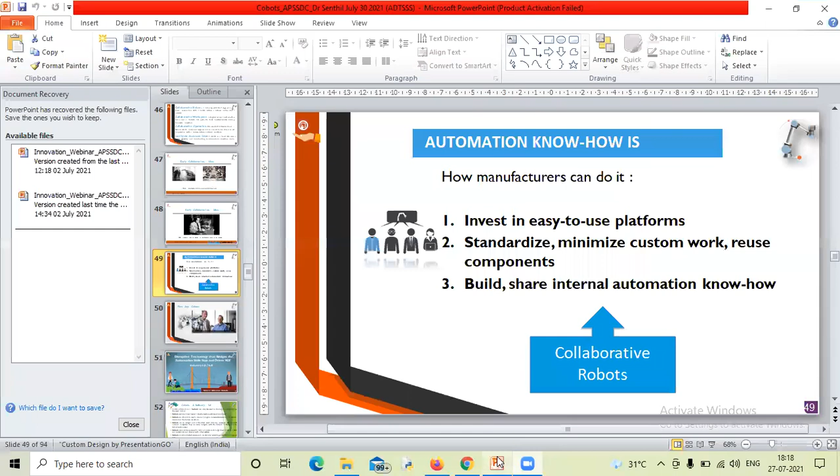So now, yesterday we have been discussing about this robot. Let me go through this one. So this is what the robot which we discussed about yesterday, and let me review yesterday's topics. Yesterday we have been discussing about the introduction to Industry 4.0, fourth industry revolution technologies, and also we have been discussing about the short introduction to the collaborative robot, cobot, isn't it? So now let us see the

continuation of this class, automation know-how. So we must use those technologies which are easy to use platforms. For example, collaborative robot is a very easy to use platform, and we should also standardize and minimize the custom work and reuse the components which can be done using the collaborative robot. You must be able to share the internal automation technical know-how with the collaborative robots.

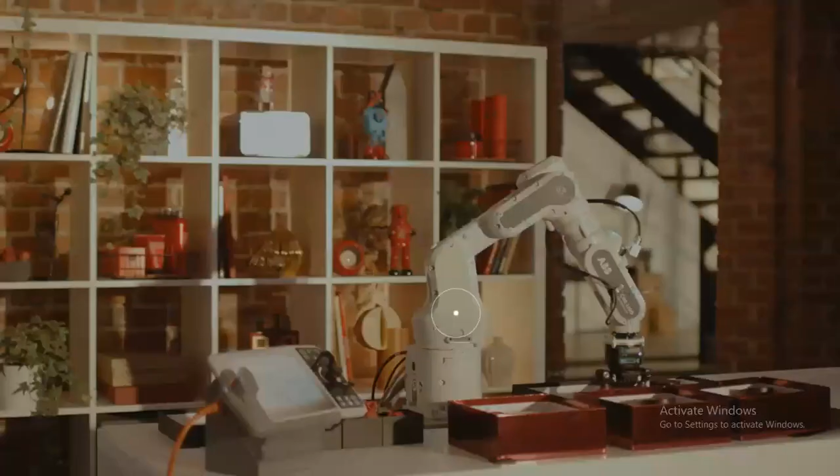So this is what you can say - if you see the collaborative robot design, there are a lot of sensors incorporated into these collaborative robots. For example, sensors to detect motion, sensors to detect distance, sensors to detect displacement, sensors to detect the weight of the object you lift, sensors to detect interactions, and sensors designed to determine motion. These cobots have several sensors incorporated in the system, so they are able to do the job more easily, more user friendly, and more comfortably along with the human workforce.

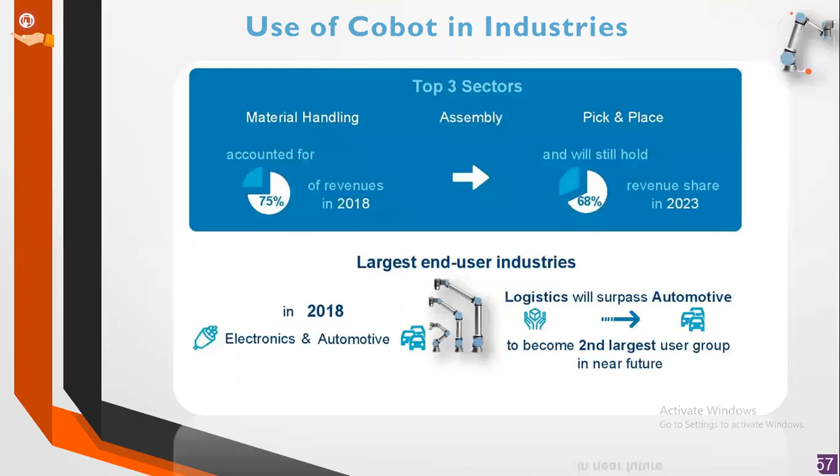It consists of an eye which is fitted with lidar. Do you know what lidar means? It is an imaging and detection system - light imaging and detection, or light detection and ranging you can call it. It will be able to detect what is around the surroundings, and that is how it makes the environment more user friendly and comfortable for the human workforce to operate.

It has got arms that will be able to pick and place objects from one place to another place. So these are the features of the collaborative robot.

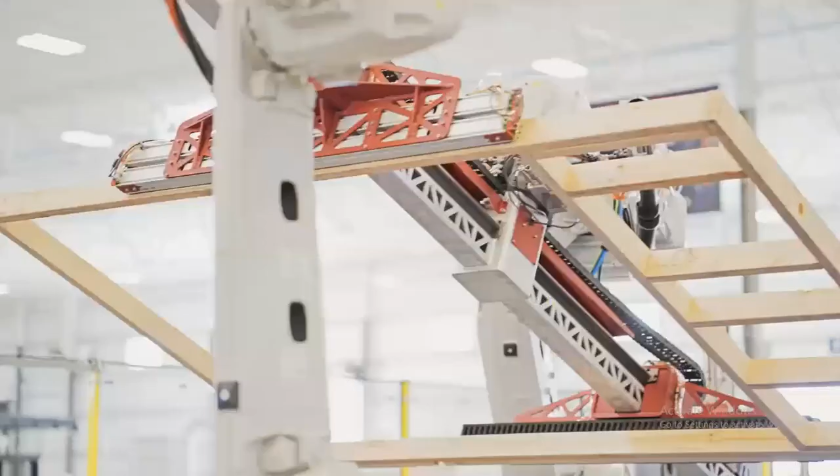So you can see that there is no human workforce working along with the universal robot, like industrial robots. You can see that the people are standing outside the fence, a little bit of distance away from the robots.

So from this video, you can see that these are very huge robots, like an industrial robot that is kept inside the fence, to avoid any accidents.

Moving forward, this slide shows the different features of the cobot. It is a lightweight cobot, 11 kg for this type of robot. Typically, robots weighing 50 to 100 kg can lift 5 kg. These are small cobots - they are very compact, have a touchpad, and are very easy to move around. They have 360 degrees of freedom, and we can easily dismantle them and move them from one place to another place, so there is no need to change the production layout.

For example, you can see in the videos later on that you don't need to change the production layout. It can be installed in production lines where conventional industrial robots cannot reach. So where industrial robots cannot perform the task, we go for universal, collaborative robots. Let me play a video over here.

So they've got a teach pendant - the one which is used by the person is called a teach pendant.

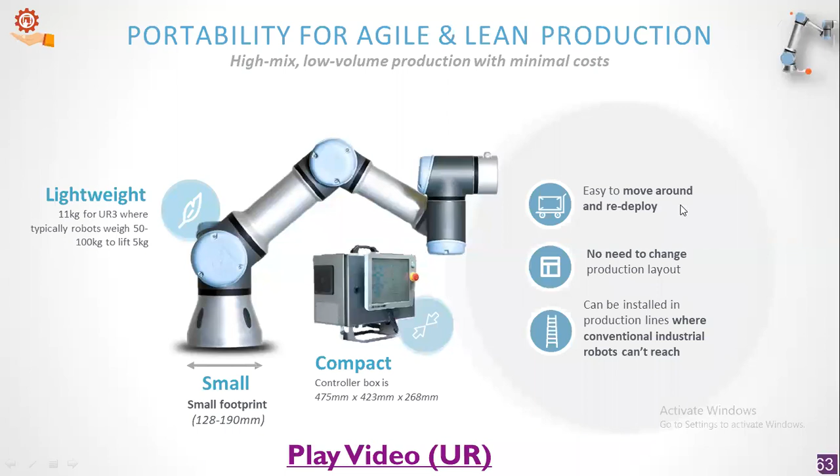Pressure is equal to force per unit area. So if you know the force, you can understand the pressure which has to be exerted on the object. These are the 6-axis cobots.

Let me show a video. It's a company called L'Oreal. You might have heard of L'Oreal because it manufactures shampoos. Let us now look at how this company uses the collaborative robot, and how they are able to save time, save cost, and save the human workforce from accidents. So let's see how the whole industry is working with collaborative robots and gaining more confidence and advantages from their usage. Let me play a video here.

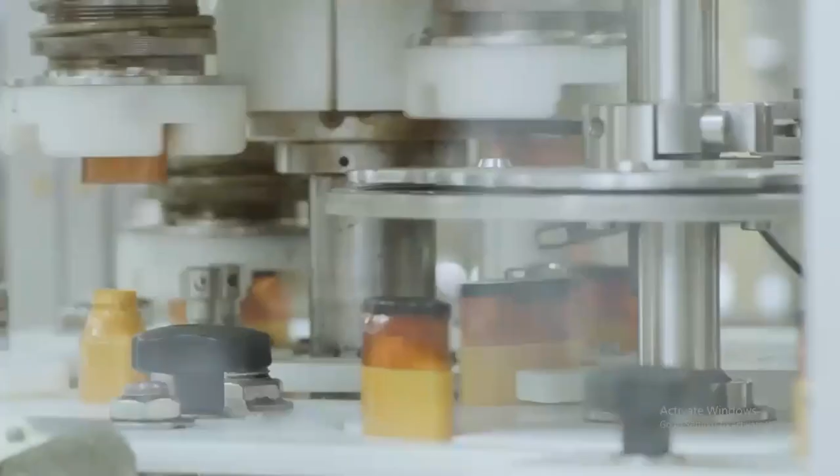One of the key priorities for Pune factory as of now is being flexible and agile in terms of serving the market in real time.

On line number 27, which is one of the fastest lines in my production unit, the end of line operation, putting the boxes on the pallet, we were doing it manually. A single operator doing the entire job of lifting 8,500 kgs of load every shift.

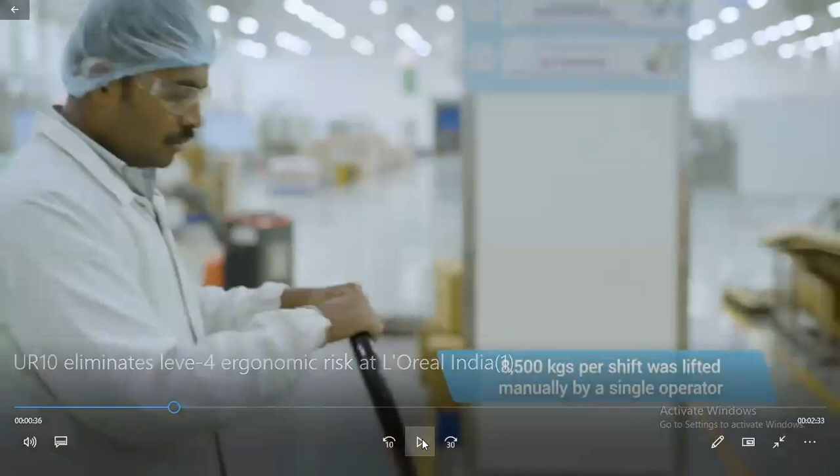A single operator doing the entire job of lifting 8,500 kgs per shift was lifted manually by a single operator. 8,500 kgs of load every shift.

Right now, L'Oreal is focusing and stepping up really hard onto the ergonomics part, and this was one of the major concerns which came from down the line. When we did our ergonomic risk analysis, we found that it is a level 4 risk and we wanted to eliminate that risk.

UR10 we installed before 2 years. The purpose of this installation was automatic palletization.

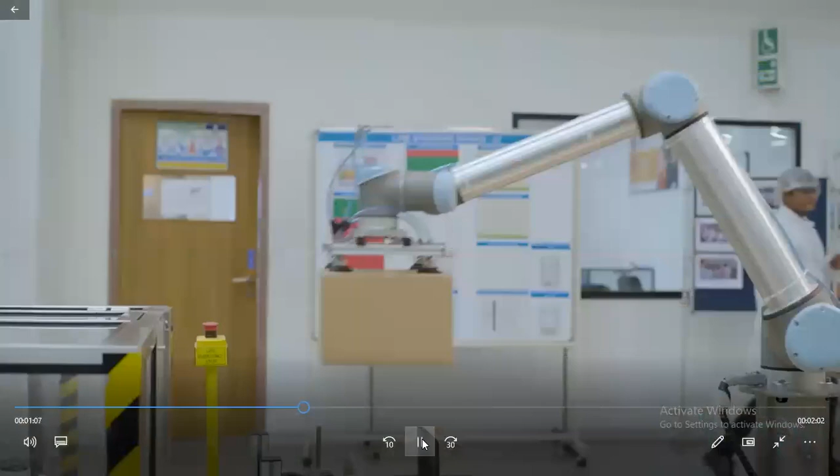Before installation of this cobot, we used a single pallet at a time for palletization. Now, simultaneously, we can use both pallets without stopping the line, where we have a 30-minute saving in every shift for pallet changeover.

We can work along with the cobot without any cage, without any safety guards. Since installation, we have never faced any breakdown problems. You can say this product is maintenance free, without any lubrication, without any maintenance investments.

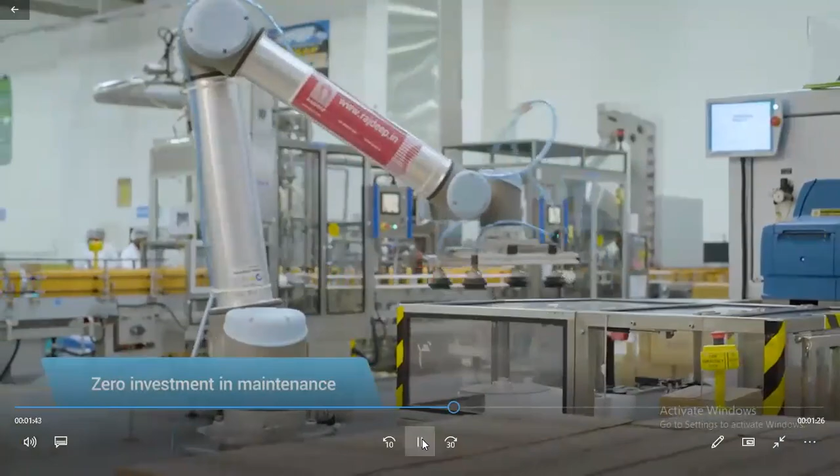We have different people coming onto the lines in different shifts, so sometimes when people change, it might impact the efficiency of the line. But with the cobot coming into the picture, it gives you process accuracy at just a single click.

Our team can use this cobot on any lines as per our requirement. We can shift this cobot easily.

Before the cobot came into the picture, we used to have a number of setups done, and it used to take around 60 to 70 minutes just to change from one format to another. But now it's simple. You just need to click the button, click it out, and the robot is ready to run on another variant.

This has helped us eliminate that ergonomic risk completely, that is continuously bending and putting boxes on the pallet. Secondly, handling a load equivalent to 8 tons in a shift is completely eliminated.

We have purchased one more cobot and deployed it on one of our lines. I can say that this cobot is very user-friendly, maintenance-free, and very efficient. We are really very happy to have the universal cobot on our line.

So, faculty members, we have seen this video of how this collaborative robot was lifting the places. These are the different applications of collaborative robots.

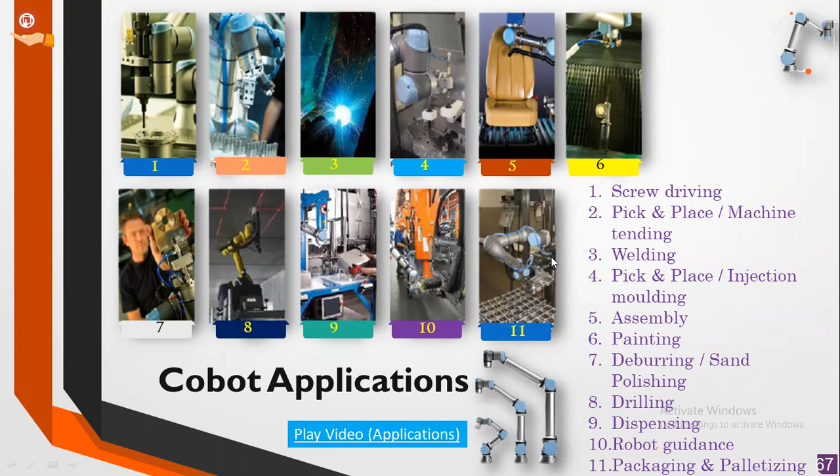For example, if there is an industry with a welding option and another with a painting option, these are two entirely different applications, welding and painting. This is how each and every industry makes use of collaborative robots for their manufacturing processes. Let me play a short video over here.

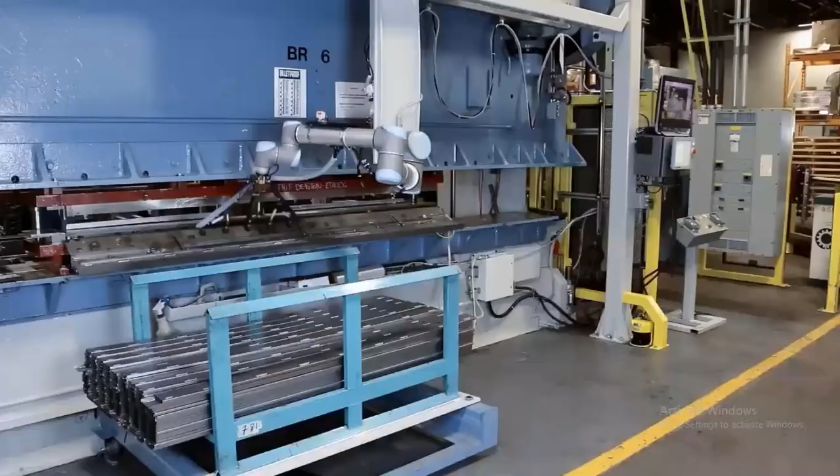Polishing. You can see how it is used for polishing. Again, pick and place of another object. Screw driving.

It can be used for quality inspection also, to find out defects using machine vision technology, guiding and dispensing.

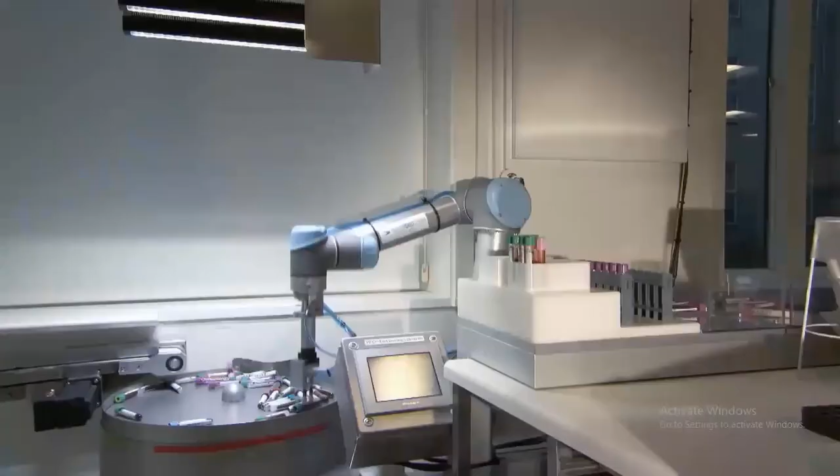Lab analysis testing is used in pharmaceutical industries. They are used in pharmaceutical industries.

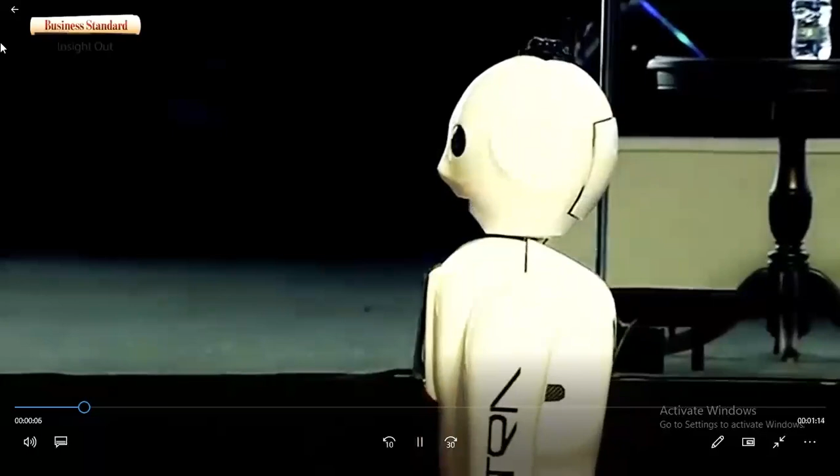Ladies and gentlemen, we would like to introduce you to Mitra, an indigenous robot developed by a young startup from Bengaluru.

So this is a humanoid robot.

May we now request the Honorable Prime Minister Shri Narendra Modi and Ms. Ivanka Trump to initiate the logo launch for the Global Entrepreneurship Summit 2017. We request the Prime Minister to kindly press the Indian flag button on the screen. Welcome, welcome, Shri Narendra Modi. May we now request Ms. Ivanka Trump to kindly press the US flag button on the screen.

So this is how the humanoid robot is an entirely different robot. This is the current status of collaborative robot usage in the industries, faculty members. Especially the main usage of these collaborative robots is in the automotive industries. It is used for material handling, welding, deburring, bolt tightening, and sealant applications.

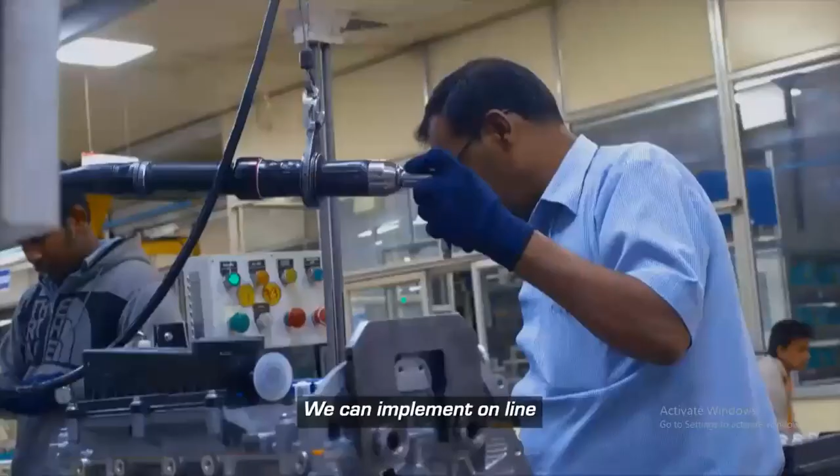I have been working here for the last 25 years. Our focus is mainly on the quality piece. Whichever is critical to quality, we want to automate it. So one of our team members gave a thought: can we go for a collaborative robot? We can implement it on line and it can work with our associates.

It's not only the sealant application or the tightening application, there is a camera which checks the quality and it gets recorded. We are able to real-time monitor the cobot performance also. It is very safe, easy to teach, very flexible. When the cobot is working with them, people are loving it.

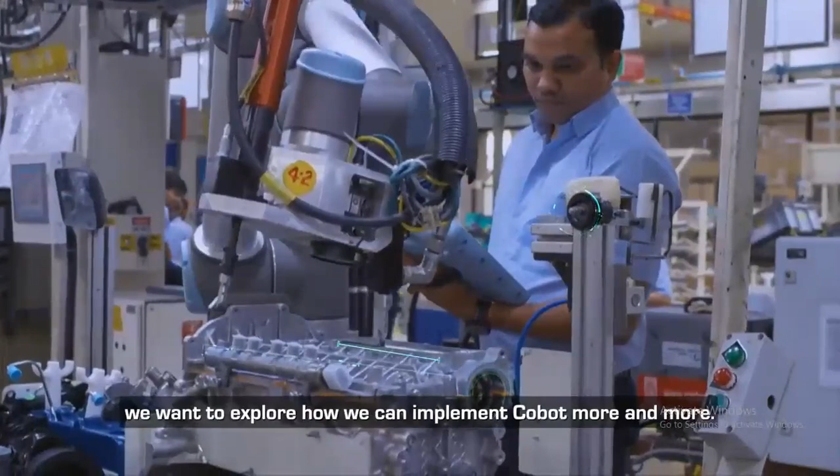The future is enormous. We all have to continuously improve with respect to what we were doing yesterday.

This is how one of the industries, Mahindra, is using the collaborative robot. These are the usage of collaborative robots in Indian MSMEs. MSME stands for micro, small, medium enterprises in India, and they are using collaborative robots for different applications.

For example, Craft and Technique industry in Pune is using the collaborative robot. Shruti Engineers in Pune, New Engineering Works in Jamshedpur, Aura Lab in Chennai, and SMEW Textile Machinery in Gujarat - these are several MSMEs using collaborative robots.

These cobots are boosting engines like the Make in India initiative. SMEW Textile Machinery in Gujarat uses collaborative robots and found their efficiency increased by 300%. Shruti Engineers in Pune says that by utilizing the collaborative robot, they're able to increase their daily production by 75%. These are the benefits of using collaborative robots in their manufacturing process.

Let me play a short video over here which will tell about this.

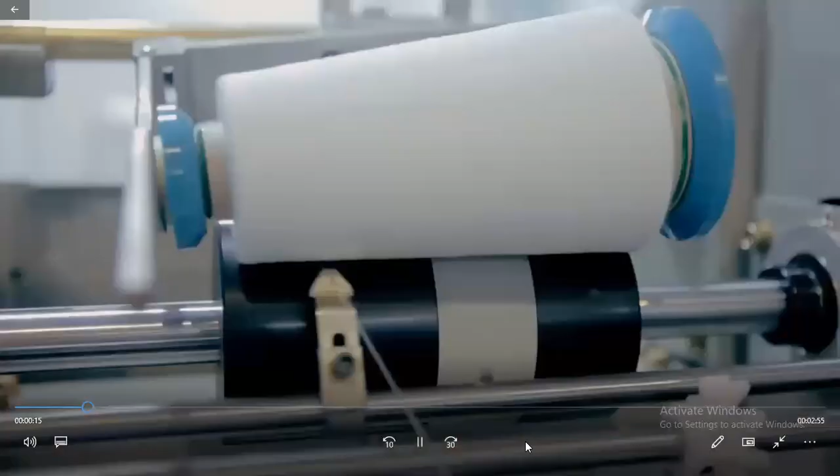Welcome to Ahmedabad, India's fastest growing city. This small city is home to some of India's biggest textile manufacturers, an industry established here as early as the 19th century. The entrepreneurship talent here was able to bring mechanized manufacturing almost 140 years ago.

I am Ashish Nagarshet, managing director at SMEW Textile Machinery Private Limited. We are a textile machine manufacturer based in Ahmedabad, India. SMEW was started in 1958 and has been our family business since then. We make textile winding machines - our main products are the package winding machine, the rewinding machine, and some customized machines for winding as well.

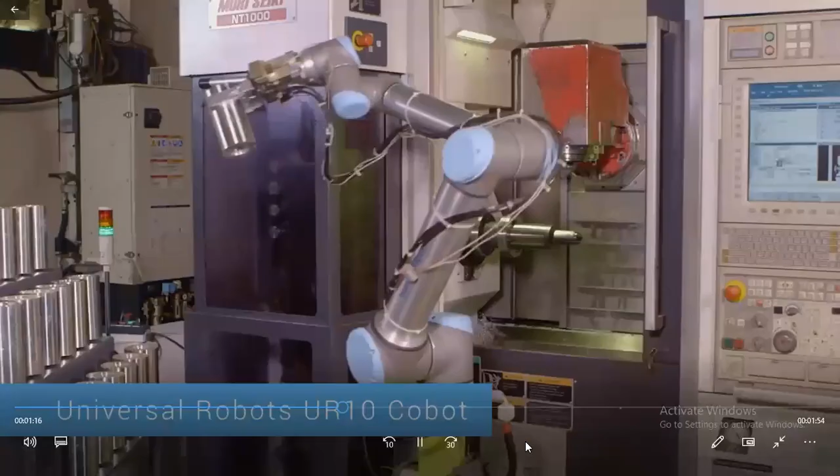With Universal Robots, a universal robot with its simplicity and non-requirement met our requirements specifically for this machine. The UR10 robot is basically being used for a pick and place application. Our operators find it very, very easy to use - it's on a different level as far as operator friendliness is concerned.

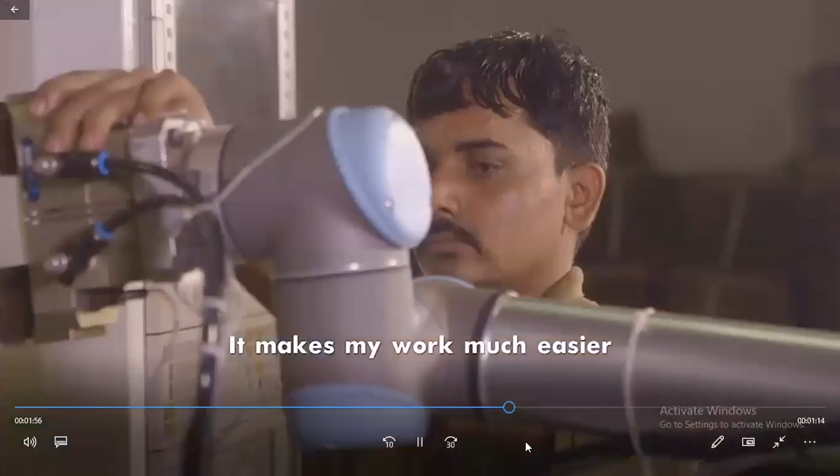The safety features were the most important part. The second important fact was that the UR10 robot has a 360-degree movement in all directions, which a normal industrial robot would not have, and that was one of the reasons it could move in a very constrained space.

The advantage with this application for us is that we are able to run the machine for much longer hours than what we would be doing using human labor.

Before the robot was installed, we were making about 30 pieces a week. Now we are able to go from 30 pieces to almost 80 to 90 pieces per week - that's a jump of almost 3 times. It's been very good for us because the return on investment is less than 12 months.

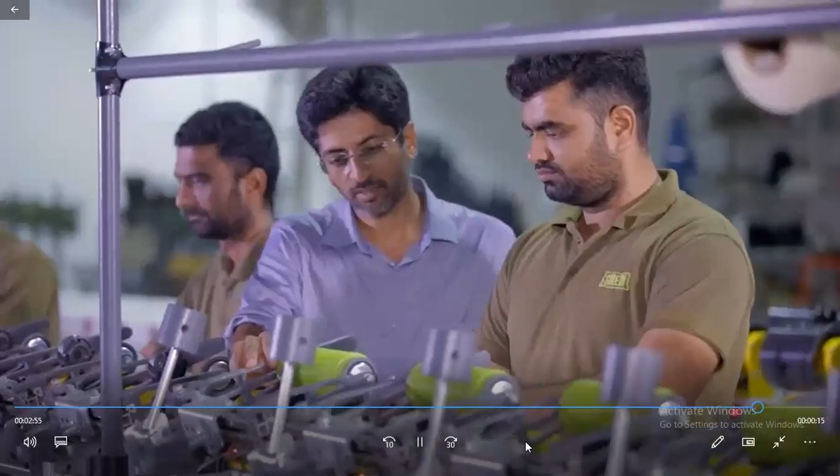We hope to have a long-term relationship with Universal Robots. We look forward to investing in more robots in the future and working along with the robots together. Just like Ashish at SMEW Machinery, many more small and medium-scale enterprises are choosing Universal Robots cobots as an affordable solution to take their operations to the next big milestone.

So faculty members, it's a very interesting video from SMEW Textile Machinery, which uses the collaborative robot. This is the successful case study of collaborative robots in Indian MSMEs.

Similarly, Aura Lab in Chennai is able to increase their efficiency by 15%. Craft and Technique industry has deployed collaborative robots for automatic inspection and CNC machine tending - they're able to increase their production volume by 15 to 20% with no defects or customer rejections.

Let me play a video over here.

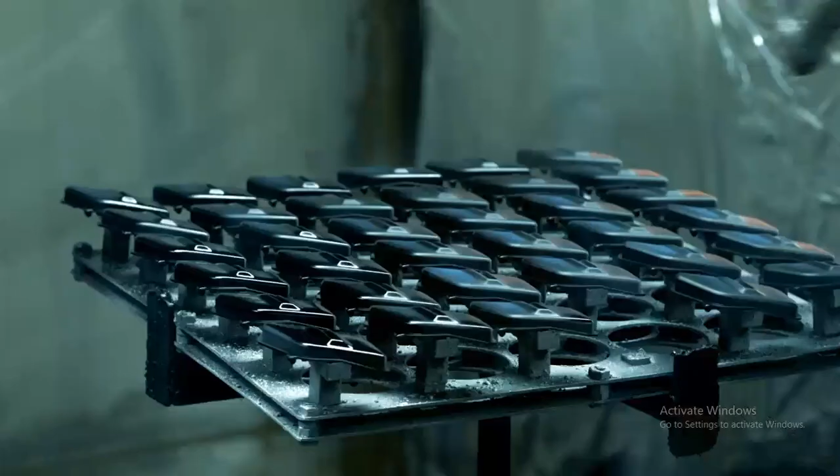In 2004 and 2005 we started with spray paint. We've been involved with almost all auto majors in the country for their day-night applications, primarily for HVAC, audio systems, cabin lights, cabin systems, hazard switches and all.

Once you apply a paint on a product and you have to laser it, you have to maintain various parameters so that the laser engraving comes out very good. Paint application primarily in our country is done by manual application.

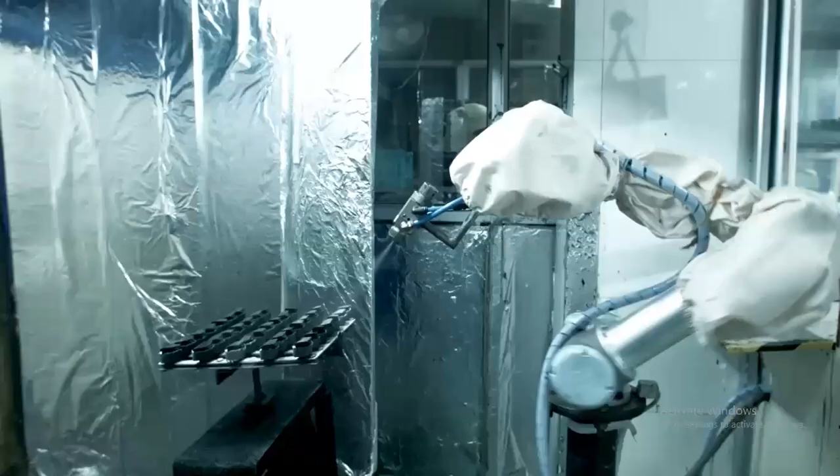Once we are doing these day-night applications, we need a very big expertise, and the thickness of deposit of paint on the product is very important. We were having some issues with respect to quality and laser. A lot of our customers are also demanding automatic application of spray.

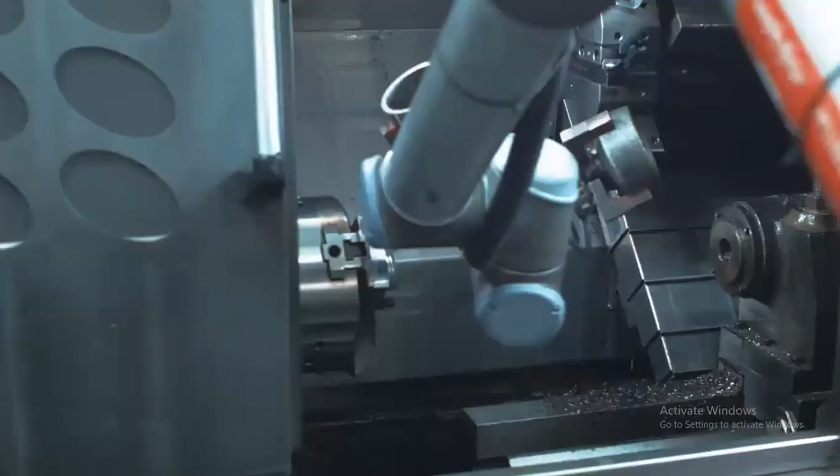We did have this notion in mind that robotics is expensive. That was the first obstacle to kind of overcome before we went for robotic operations.

What I had in mind was probably a smaller operation, a smaller robot. And when I checked for different robots available in the market, Universal Robot did definitely top that list, very honest.

Collaborative robots was one very important point going ahead with Universal, because we got a lot of operators working on the shop floor, and we did not want to seclude an area just because there was robotic operations there.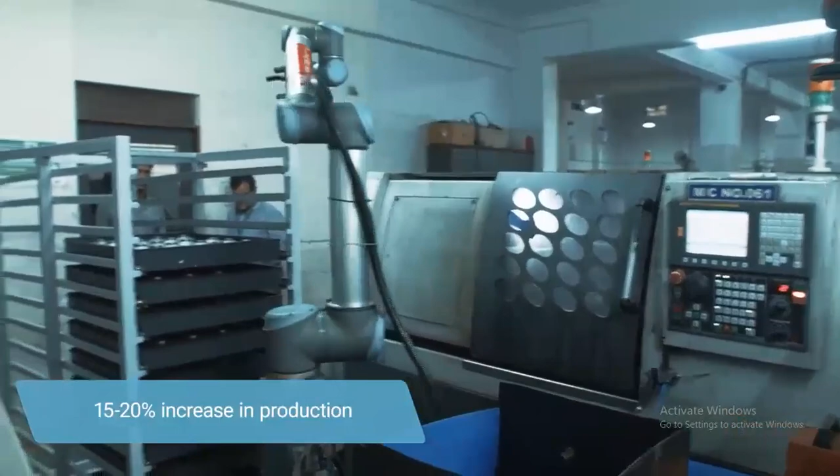Once we decided to set up a robo, we had a couple of things in mind. We had a space constraint, so we had to think of what kind of space and what kind of robo we had to set up.

Secondly was the safety aspect. Since we had a very confined space, we had to see how friendly the robo system is in working with a human. Universal Robots is a very small robo; we can install it anywhere on the base panel also or hanging also.

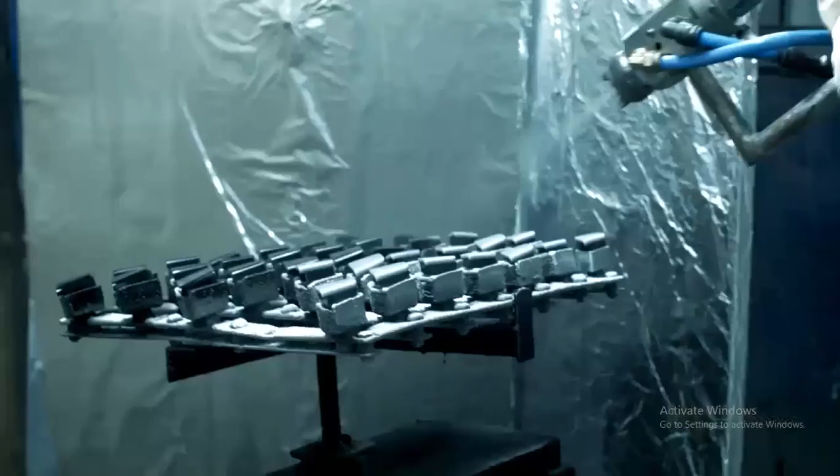So once we have put this Universal Robots into production, it's hardly 2 months. And what we have observed is we are getting a better quality product. The rate of rejections or rework have reduced drastically.

We are doing X+20% with the robo even running at 50% of the speed. So in a couple of months' time, we'll increase the speed, and then of course we'll go almost 1.5 times what we were getting previously with the human interface.

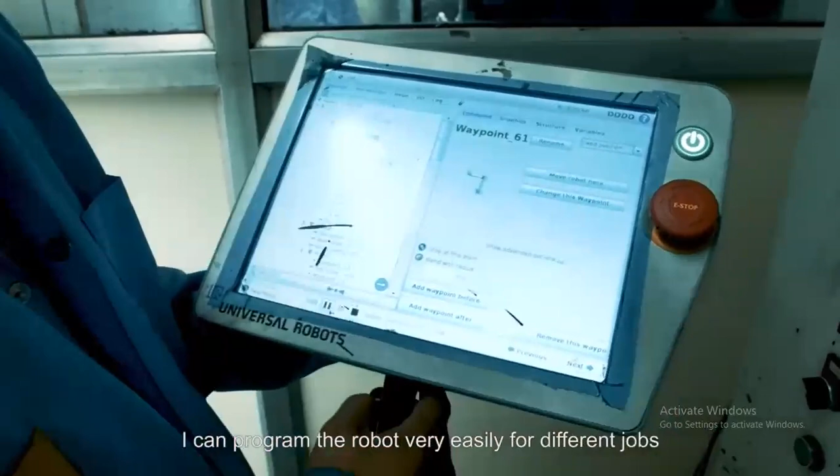All these guys are handling the robot by themselves, and they have been very clearly told that they are not on the firing line because of robot. We are going to install more robots, and these guys will be trained.

We have plans in 2018-19 to get at least 3 robots in-house working with us.

I feel everybody should start the process of automation right from the first stage itself. The best combination is that we want to have robots. I have a vision that every category needs to have at least 10 robots, and we will definitely see more than at least 5 robots across categories.

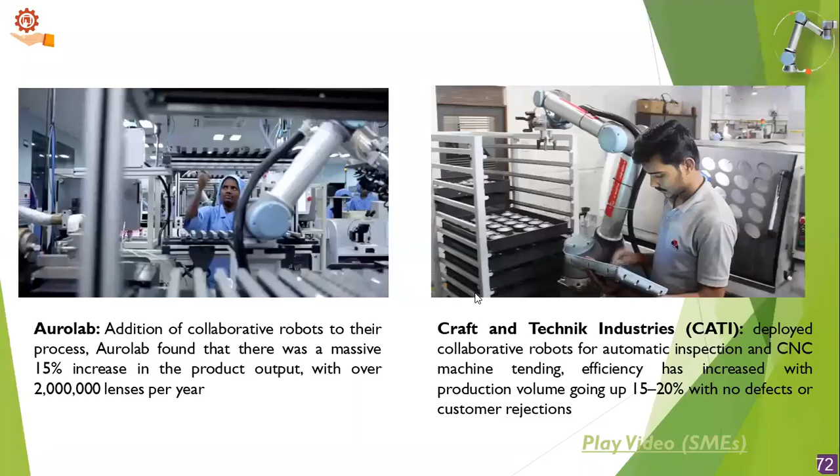This is how different MSME industries are using collaborative robots in manufacturing. Coming to automotive industries, especially Bajaj Auto, which is the third largest automotive manufacturer globally and the second largest manufacturer of automotive vehicles in India. They are using collaborative robots, and in fact 50% of the Bajaj workforce comprises women on their assembly lines. Let's see this video on how collaborative robots are being used by Bajaj Auto.

Millions of women in India today are giving wings to their ambitions. Rameshwari is one of the employees who has entrusted her dreams to the visionaries at Bajaj Auto Limited. Founded in 1945, Bajaj Auto Limited in India is the world's third largest, and it sold close to 3.3 million vehicles in 2015.

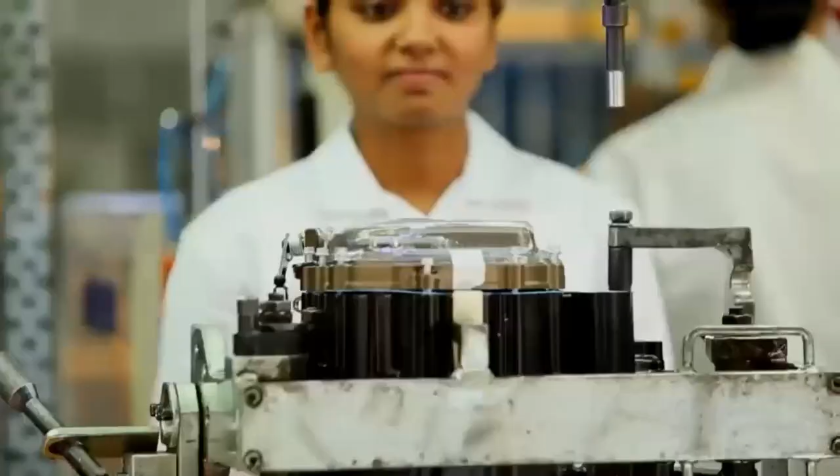The man behind this success is Mr. Rahul Bajaj. Taking the legacy to new highs is his son, Rajiv Bajaj. Bajaj saw huge transformations in its production systems under the passionate technical leadership of Pradeep Srivastava. Bajaj also became the first company in India to implement collaborative robots in assembly lines way back in 2010, and now has over 100 cobots deployed in its production facilities. From repetition to efficiency, the journey has been exhilarating - a true example of giving power to the worker. Armed with these cobots, these workers play a significant role in the Make in India drive.

In 2010, we were looking for solutions for automating our assembly lines. The two-wheeler assembly lines are highly labor intensive, space challenged, and can have physically taxing movements due to huge amounts of repeated motions requiring precision. There was also an emerging requirement - by trying to automate these lines, one basic requirement was standardization. Whatever automation we chose had to be standardized so it could be horizontally deployed. Overall, we needed productivity, flexibility, reliability, and most of all the ergonomics of the workers. We were also cognizant of the requirement of the women workforce there.

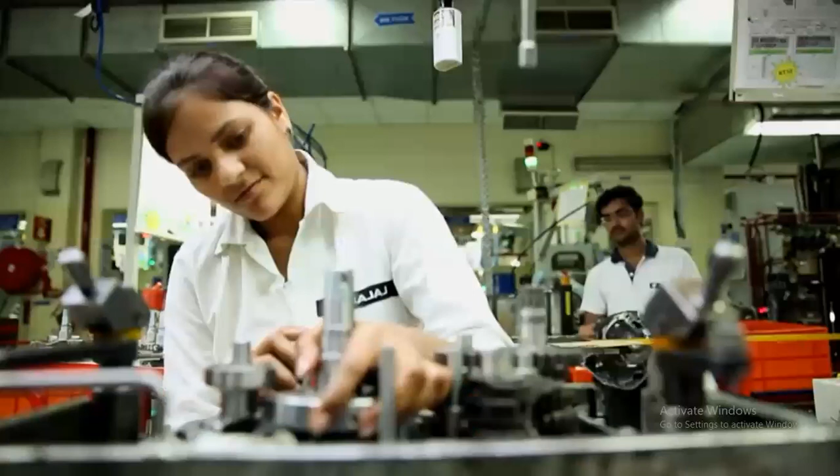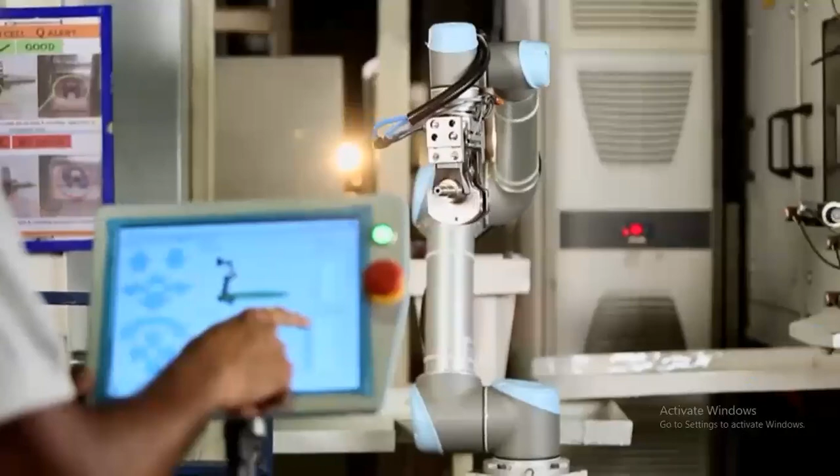What made you choose Universal Robots? Throughout that time when we were searching for robots for our assembly lines, we did an intense study on all the robots available in the market. We found UR robots were very compact and very light in weight, unlike other robots. Most significantly, they were very safe to work with human beings because they were collaborative in nature. We actually tested these robots for almost 3 months - they were pretty safe and met all the functional requirements. So it was put in as a standard solution which we wanted to deploy.

We deployed it for various applications - we did material handling, machine tending, and a lot of special processes which are now patented, including decal applications. And of course, we moved into assembly lines where we are trying to help the ergonomics of the workers with the right kind of precision and repeatability.

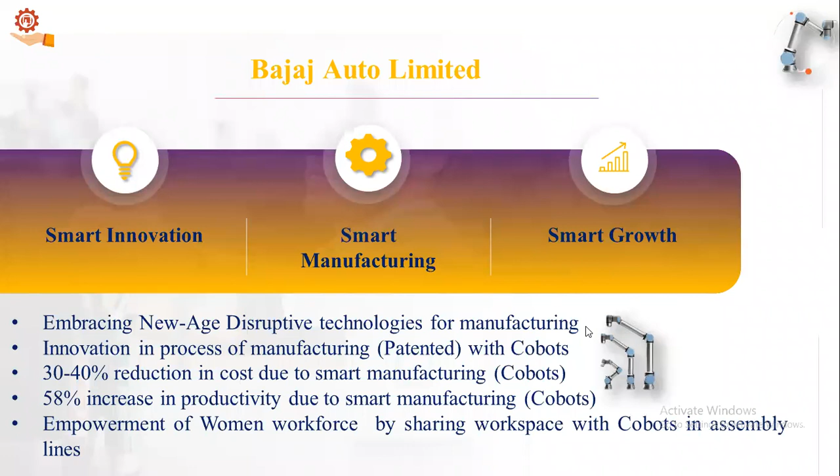And 58% increase in productivity has happened due to smart manufacturing. Lastly, empowerment of the women workforce by sharing workspace with collaborative robots in their assembly lines. So these are the benefits.

Moving forward, this is collaborative robots in academia. Let us look at PSG College of Technology, which has a robotics department. They have procured collaborative robots and are able to train students by performing experimentation with the collaborative robots. Let me play a video about the collaborative robots.

Dr. K. Prakasan, principal in charge, PSG College of Technology: We have totally about 8,500 students. We are ranked within the top 50 institutions in the country. And it is part of our vision and mission that things should continuously get updated.

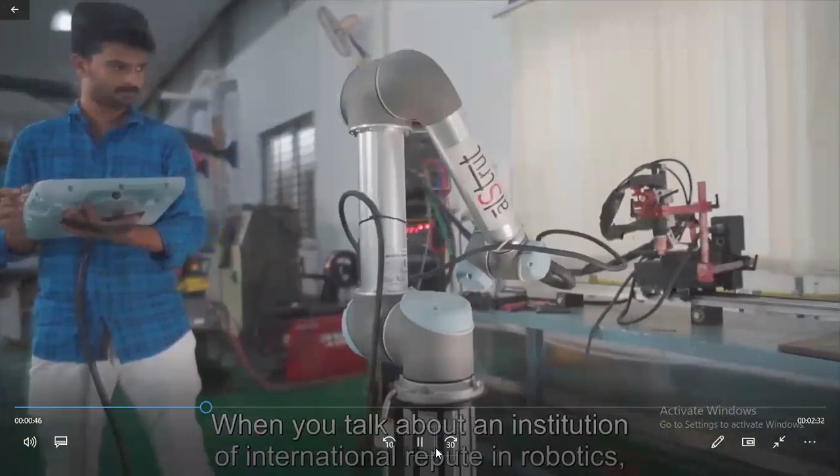In 2011, PSG College of Technology decided to start an undergraduate program in robotics and automation, the first such program in the state of Tamil Nadu. When you talk about an institution of international repute in robotics, we should have all the ingredients. So we have industrial robots, and then we were searching for cobots, and we found Universal Robots. We have a UR5 Universal Robot.

After buying it, we felt it is very user-friendly, very easy to set up, and it is a robot that works on an open source platform. So students can also download some driver software and do experiments. Customization is very easy. We have incorporated this into the curriculum for the BE Robotics and Automation Engineering program.

The traditional robots we have in our laboratories are very huge. They are kept inside safety cages and fences where we are not allowed to enter. They have a separate workspace and operators have to stand outside. Whereas with cobots, we can work along with them. Traditional robots work autonomously away from human beings, whereas cobots work along with human beings.

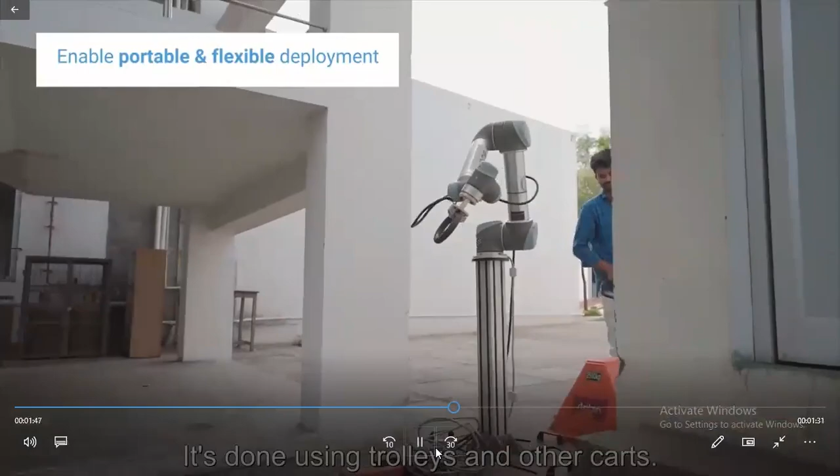Cobots can be moved from one place to another, using trolleys and other carts. As a teacher, I can take it to the classroom, so students can get a feel for what 6 degrees of freedom means, instead of having to imagine it, you can demonstrate it right there in the classroom.

Robot Operating System is a very popular operating software now used in a lot of robots. Other brands of robots have their own customized, dedicated software, but Universal Robots has a platform that works on ROS. So for our students, it's easy to understand the application of ROS in an industrial robot.

When we presented this proposal to the Department of Heavy Industries, Government of India, they wanted a state-of-the-art center. So this is how collaborative robots are used in academia.

There are a lot of training initiatives by the Government of India, including the Andhra Pradesh State Skill Development Corporation, National Productivity Council, Quality Council of India, PHD Chamber of Commerce, and Confederation of Indian Industries, which has been conducting training programs, certifications, and webinars to reskill and upskill.

Let us now look at how automation in Indian industries is happening. Walmart-owned Flipkart has deployed around 100 robots. Flipkart's robots are able to sort nearly 4,500 packages in an hour. And also...

Industries like Kia Motors and Havells Limited are using collaborative robots, as well as industrial robots, for their manufacturing. Let's have a look at Kia Motors, which is located in Andhra Pradesh.

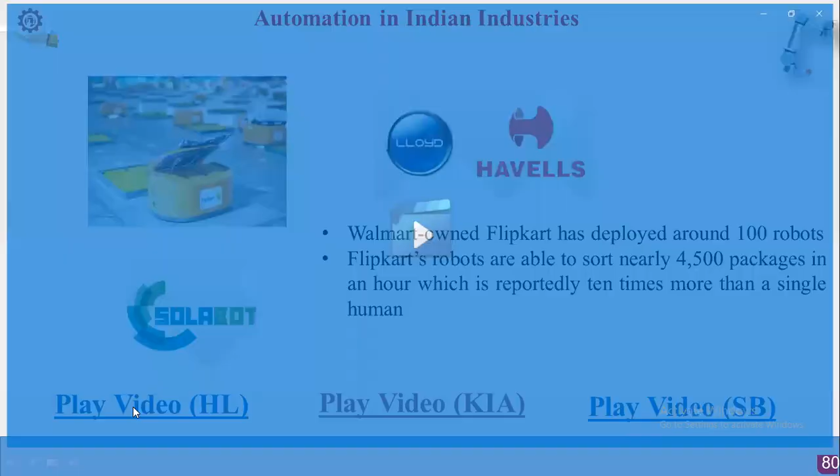So this is one industry. Another industry I'd like to show is a very interesting video of Havells India Limited. They are pioneers in the manufacturing of electrical equipment.

Combining cutting-edge innovation with a firm grasp of their customers' needs. Lloyd, a leading consumer durable brand operating in high-end LED TVs, air conditioners, washing machines, and refrigerators, is now owned by the FMEG giant Havells India Limited, a company with a legacy going back to the 1950s.

When we bought Lloyd, we came back to our philosophy that we can be globally competitive. Today we have set up a very large manufacturing facility, and we are proud to say that we will now be selling everything made in India in Lloyd air conditioners.

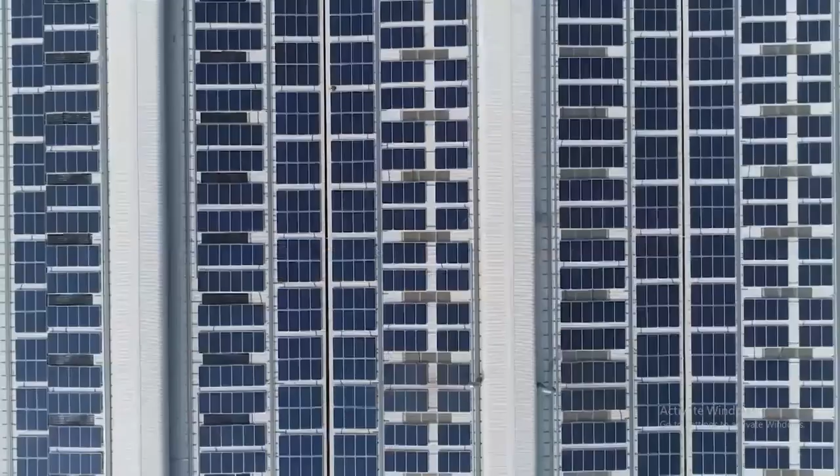Located in Ghiloth, Rajasthan, the air conditioner manufacturing unit of Lloyd is one of the largest air conditioner plants in all of Asia, and is operated entirely on energy generated through rooftop solar panels. The plant functions with complete automation, a tremendous industry advantage that significantly improves manufacturing efficiency.

This is as per the Industry 4.0 principle. In India, there are still plants operating at Industry 2.0 and 3.0 levels. Compared to that, this is one of the latest plants using all kinds of latest technology. We are using 70 robotic operations in a very efficient and effective manner for mass production, which helps us ensure inbuilt quality.

The plant extensively uses artificial intelligence and digital technology, where all the machines and processes are connected through a single robust Wi-Fi system.

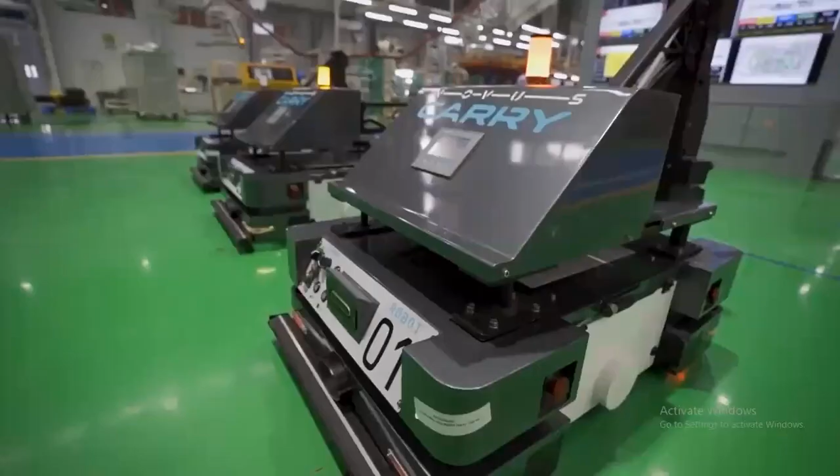Apart from robotic arms, we also use AGVs, automatic guided vehicles. The AGVs are all pre-programmed, so they go to the location. Let's say if assembly A is ready and needs to go to assembly B, it's pre-programmed as per time, so it picks up from A and takes it to B.

Lloyd is the only brand with capabilities of manufacturing all parts of a complete air conditioner in-house, which makes the product cost-effective and energy efficient.

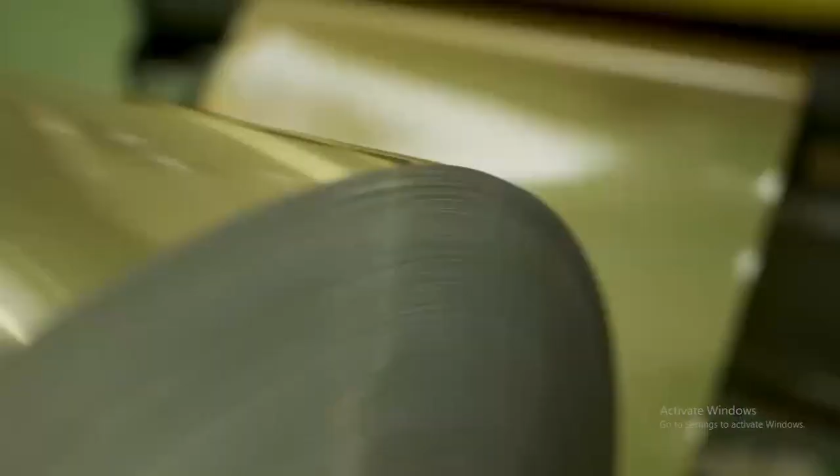This high-tech plant also manufactures heat exchangers. A plethora of smaller parts are manufactured from scratch in this factory as well, made from an assortment of raw materials including copper tubes, aluminium, steel sheets, and high-impact polystyrene.

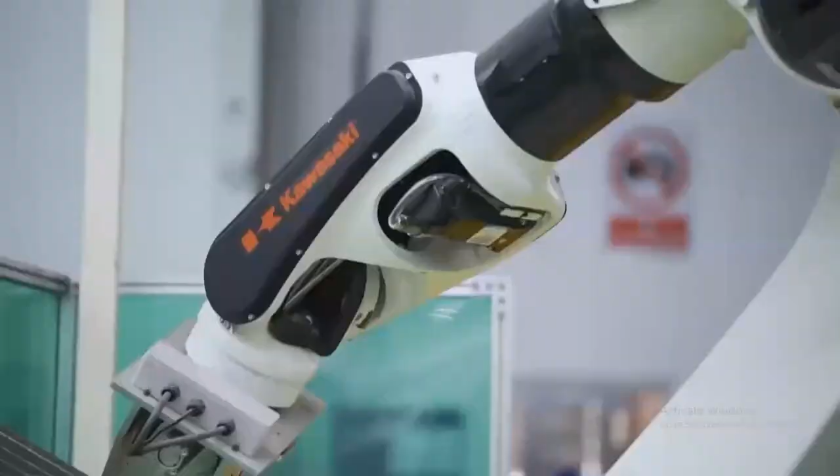The steel parts, once carved out, are sent to the paint shop, where they are covered in coats of eco-friendly zirconium chemical paint for durability and aesthetic appeal. All these manufactured components are then assembled together into an air conditioner as we know it. Before the ACs can be dispatched, they go through various stages of rigorous quality checks.

With a vision into the future, the company is now planning to launch air conditioners activated by voice command - 'Turn on AC' - their next big ticket item. I think over a period of time, we will see all our product categories getting connected to each other, communicating with the Internet of Things. The future lies in how we can make our products, from electrical and mechanical products to completely electronic products, where we can have Internet of Things tied in.

Havells India Limited has today emerged as a dominant player in the fast-moving electrical goods industry, and continues to soar to greater heights.

So this is how the video from Havells India Limited. Moving forward, we have faculty members, and we have a lot of demo centers across India to promote Industry 4.0 technology. We have Siemens India Digital Factory in Maharashtra, Siemens Digital Experience and Application Center at Karnataka, Marshall India 4.0 Center at Ludhiana, and Omron Automation Center at Maharashtra also.

So, e-learning through the collaborative robots - I would like to show the more important aspect of this website, which is the Universal Robots Academy. Let me take you through this website. If you have the laptop, you can open this link. Universal Robots Academy - click this one, Start Academy.

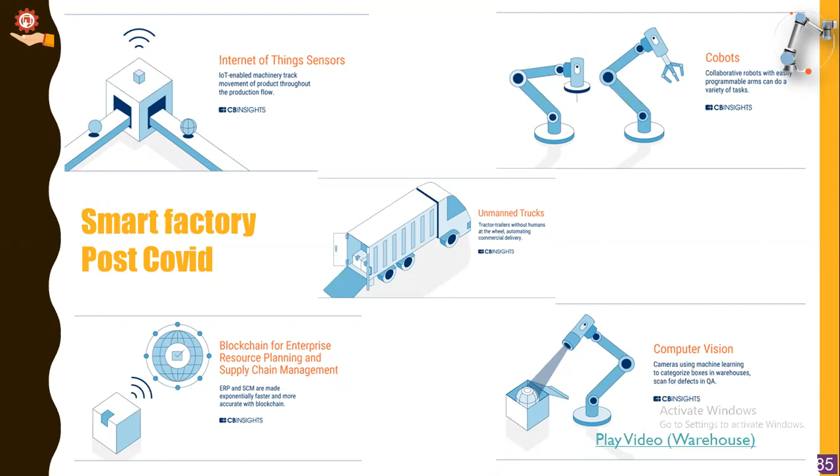And the cost of the collaborative robots is 15 to 25 lakhs depending upon the payload. What do you mean by payload? Payload is nothing but the weight that the collaborative robots can lift - the object weight.

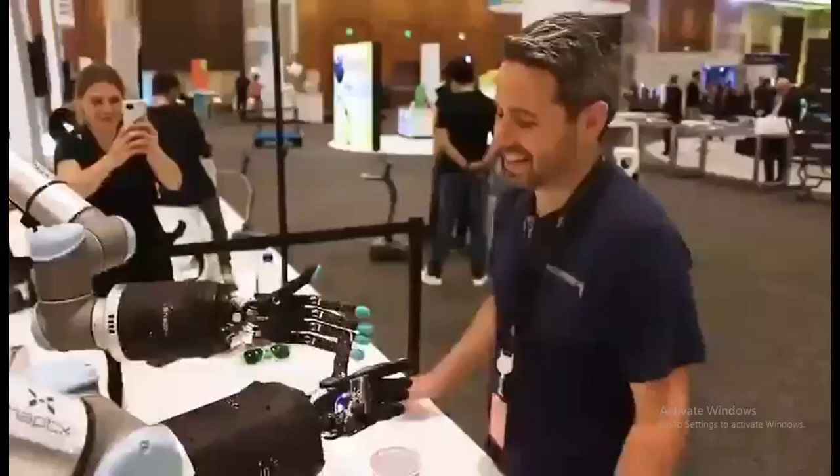So, in conclusion: there is a proven record of competencies in smart innovations and disruptive technologies in India, with successful implementation of smart manufacturing technologies across manufacturing sectors. There is an increase in employment opportunities with the advent of smart innovation and technologies in India. The facts and figures reported inclusive growth in the manufacturing sector, which enormously contributes to the economy of the nation. So thank you so much for giving me the opportunity for today's session.